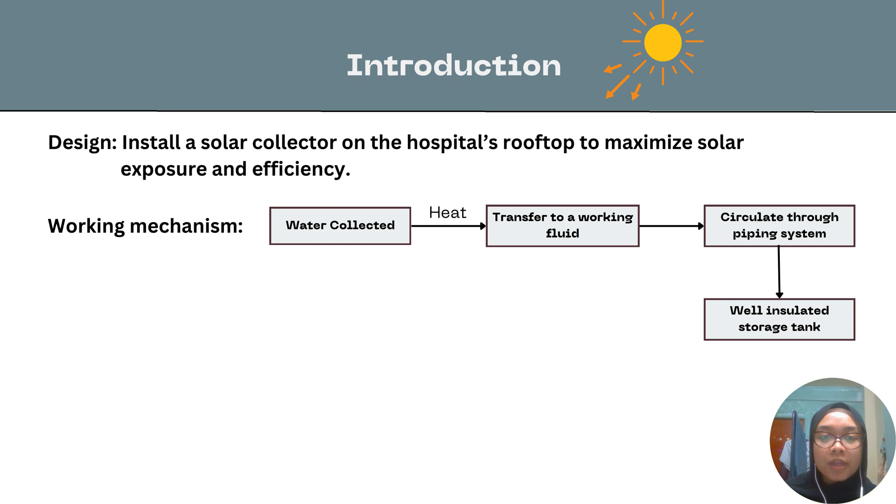The collected solar energy will be converted into heat and transferred to a working fluid, which will then circulate through an integrated piping system to a well-insulated storage tank. The stored hot water in the storage tank then will be supplied to the hospital for its continuous need for sanitation,

laundry, and patient care. The system will be designed to ensure a reliable and consistent hot water supply while significantly reducing energy consumption and operational costs. This initiative aligns with sustainable practices, supporting hospitals' commitment to environmental responsibility and energy efficiency.

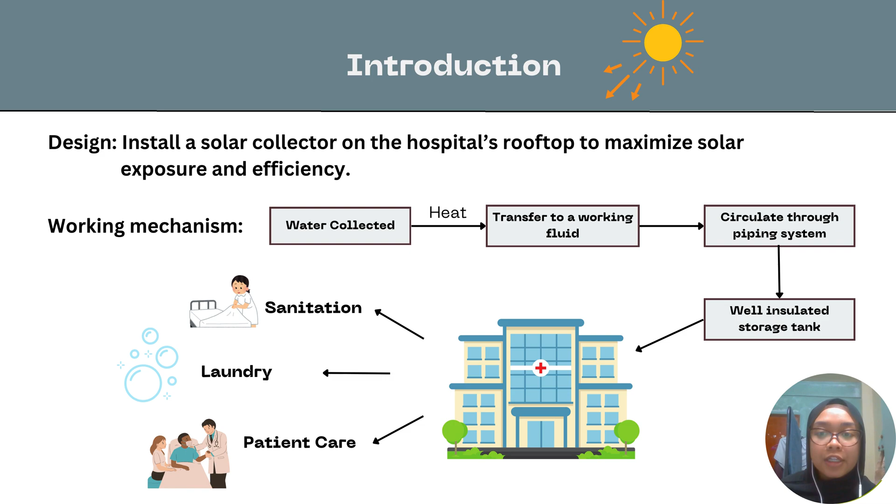Solar water heater is an effective way to generate hot water using solar. They are categorized into two types, which is active systems, which utilize circulating pumps and controls, while passive systems operate without them.

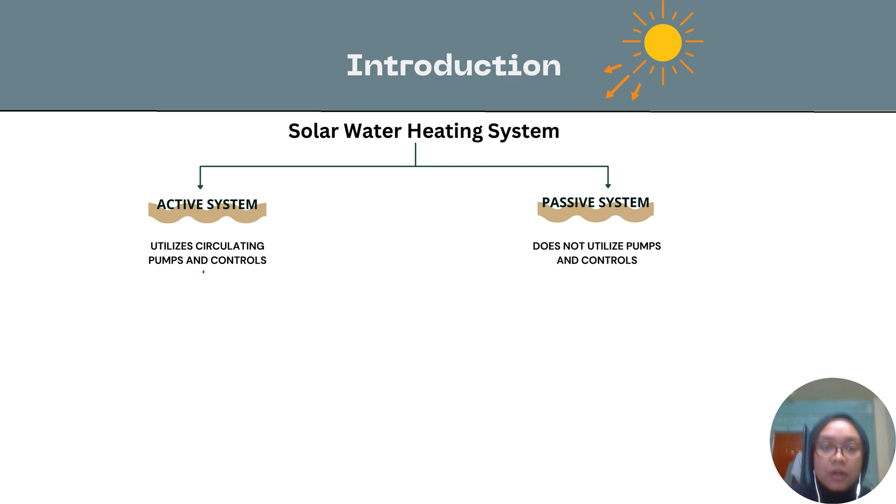For active solar water heating system, which are categorized into two types, which is direct circulation system, or known as open loop system, and also indirect circulation system, or known as closed system. Direct circulation systems use pumps to move household water through solar collectors and into the home, making them suitable for areas with mild climates where freezing is rare.

In contrast, indirect circulation system, or known as closed loop system, use pumps to circulate a non-freezing heat transfer fluid through the collector and a heat exchanger to heat the household water, which is ideal for regions with frequent freezing temperatures.

For passive solar water heating system, there are two main types of passive system, which is integral collector storage, which consists of a storage tank covered with a transparent material to allow solar heating of the water. And also another one is thermosiphon system, where water is heated in a rooftop collector and flows through the plumbing when a hot water faucet is opened.

In this project, the direct open loop water heating system is chosen to be designed for hospital necessities. In this system, the water that will be used in the hospital will be circulated directly through the solar collectors, which then will be heated by the sun. This design is straightforward and involves fewer components, making it easier to install and maintain.

And since the water is heated directly in the collectors, it results in higher efficiency and lower installation and maintenance costs. The disadvantage of this system is it is not suitable for climates with freezing temperatures, as the water can freeze and cause damage to the system, hence it is suitable to be designed in Malaysia as the climate is hot.

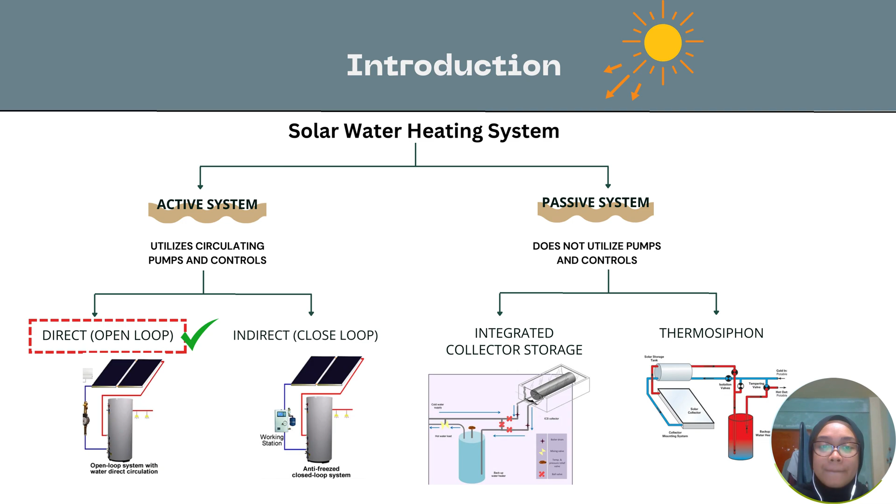Most solar water heaters need a well-insulated storage tank with extra outlets and inlets connected to the solar collector. In two tank systems, the solar heater preheats the water before it enters a conventional heater, while one tank systems combine the backup heater and solar storage in one tank.

There are three main types of residential solar collectors, which are flat plate collectors, integral collector storage system, and also evacuated tube collector. Flat plate collectors are insulated, weatherproof boxes that contain a dark absorber plate under one or more glass or plastic, which is polymer, covers, while unglazed flat plate collectors, typically used for solar pool heating, have a dark absorber plate made of metal or polymer without a cover or enclosure.

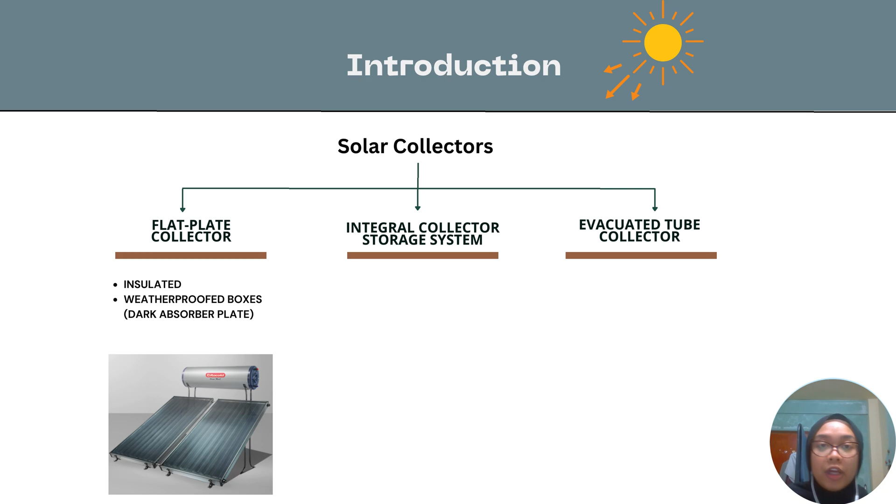The integral collector storage system, also known as ICS or batch system, features one or more black tanks or tubes in an insulated glazed box. Cold water first passes through the solar collector, which preheats the water. The water then continues on to the conventional backup water heater, providing a reliable source of hot water. They should be installed only in mild freeze climates because the outdoor pipes could freeze in severe cold weather.

For the last type of solar collectors, which is evacuated tube, they feature parallel rows of transparent glass tubes. Each tube contains a glass outer tube and metal absorber tube attached to a fin. The fin's coating absorbs solar energy but inhibits radiative heat loss. These collectors are used more frequently for United States commercial applications. In this project, the flat plate collector is chosen to be designed due to their versatility, cost effectiveness, and reliable performance.

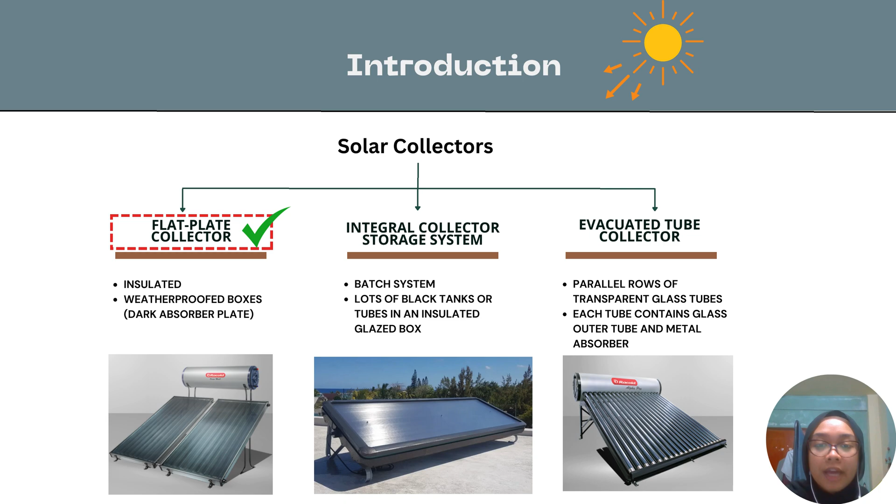This project of solar water heating system has three objectives. The first objective is to design a solar water heating system in providing hot water to a hospital in Ipoh. The second objective is to conduct a comprehensive cost and economic analysis for solar water heating system to assess its financial feasibility. And the last objective is to identify the potential environmental impact associated with solar water heating system that will be designed.

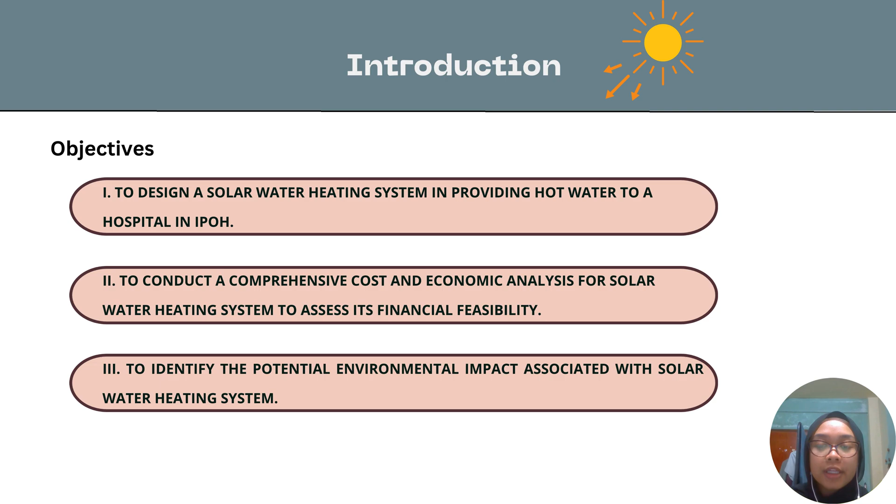There are three scopes of work in this study. The first one is employing SolidWorks software to design the solar plate collector for open loop solar water heating system. The selection of materials plays a crucial role in this process, requiring careful attention to thermal properties such as thermal conductivity and radiant heat transfer coefficients.

To accurately size the solar water collector, which is the system's primary component, the data on the hospital's annual hot water consumption is gathered through a literature review. This ensures that the system is tailored to meet the specific needs of the hospital in Ipoh effectively.

The second scope of work is to perform cost and economic analysis for the thorough examination of energy cost and payback period. After completing the design and necessary calculations, a cost and economic analysis will be performed to evaluate the financial viability of implementing the solar water heating system.

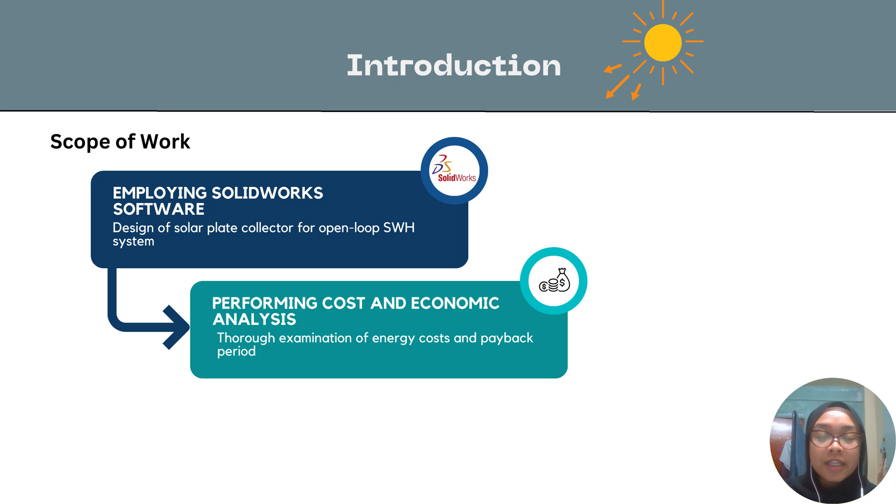This analysis includes an examination of energy costs and the calculation of the payback period, which indicates the time required for the project to recover its initial investment. A shorter payback period is advantageous as it reflects a faster return on the initial expenditure.

The last scope of work of this project is to perform environmental analysis. So the solar water heating system must operate under various environmental conditions, making an environmental analysis essential for ensuring optimal performance. So gaining insights into how these environmental elements affect the solar water heating system is critical for designing solutions that can function efficiently and sustainably over time.

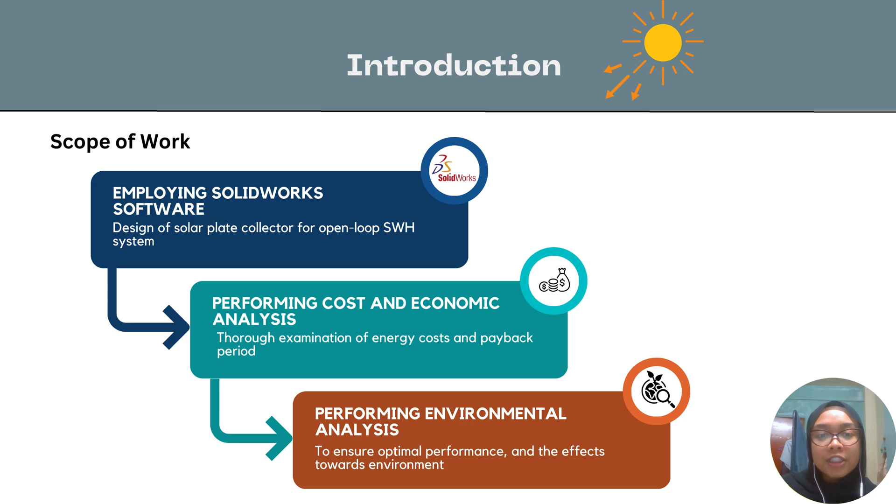Next, moving on to the literature review section. So the first literature review done was on the hospital capacity. So here we have selected an example of KPJ Ipoh Specialist Hospital. According to KPJ Health Official 2024, KPJ Ipoh now has a capacity of 267 beds, indicating that they could admit around 267 patients at one time.

Next is the local solar irradiance of Ipoh. According to the International Renewable Energy Agency (IRENA), Ipoh has a global horizontal irradiance or GHI average of 4.9 kilowatt-hours per square meter daily, or about 1,800 kilowatt-hours per square meter yearly.

And now we move on to the flat plate collector. The flat plate collector has several advantages over other solar thermal systems. It is simple, cost-effective, and reliable. Flat plate collectors are also able to capture both direct and diffuse solar radiation. Thus, it is very efficient.

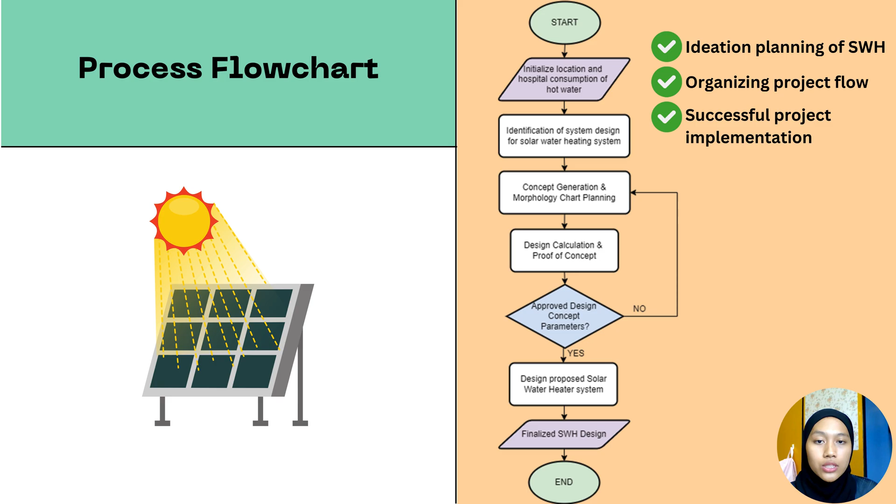After that, if the design concept parameters are approved by the team members, we could then proceed with the designing step. And this will indicate the finalized solar water heater system, and the flowchart ends. So the significance of this flowchart is crucial for the ideation planning of the solar water heater, organizing the project flow, and also ensuring a successful project implementation.

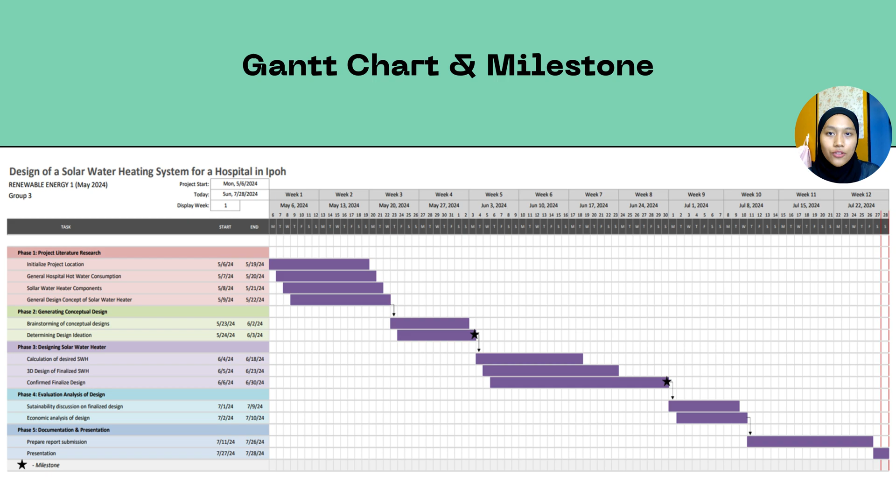Now, for the Gantt chart and milestones, here we have highlighted five main phases of the project. The first phase is project literature research, phase 2 is generating conceptual design, phase 3 is designing the solar water heater, phase 4 is evaluation analysis of design, and finally phase 5, which is the documentation and presentation phase. So throughout the semester, we have consumed around 12 weeks in order to complete the project.

Next, for the project activities, we have highlighted two main activities, which are first the calculation part and second the designing part. For the calculation part, we have two main equations that we have used. Given the specification and initialization parameters, we first have to find the heat energy transfer, and afterwards we use the second formula to obtain the required number of panels in order to meet the project outcome, which is having a water discharge of 80 degrees Celsius.

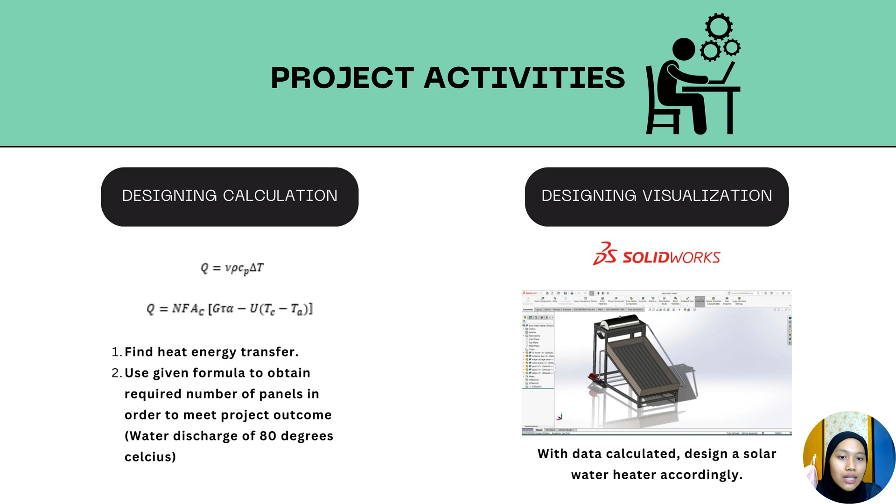And after finalizing the desired parameters, next comes the designing part, in which we have utilized SolidWorks simulation to design the solar water heater system.

Before proceeding to the calculation section, first we have to identify the assumptions and also given specifications for this project. So first, we assume the ambient temperature in Malaysia is 26 degrees Celsius. And second, we also assume that the supply flow into the collector has a temperature of around 30 degrees Celsius. And according to our literature survey, we have identified that the average solar radiation in Malaysia is around 4.9 kilowatt hour per meter squared each day.

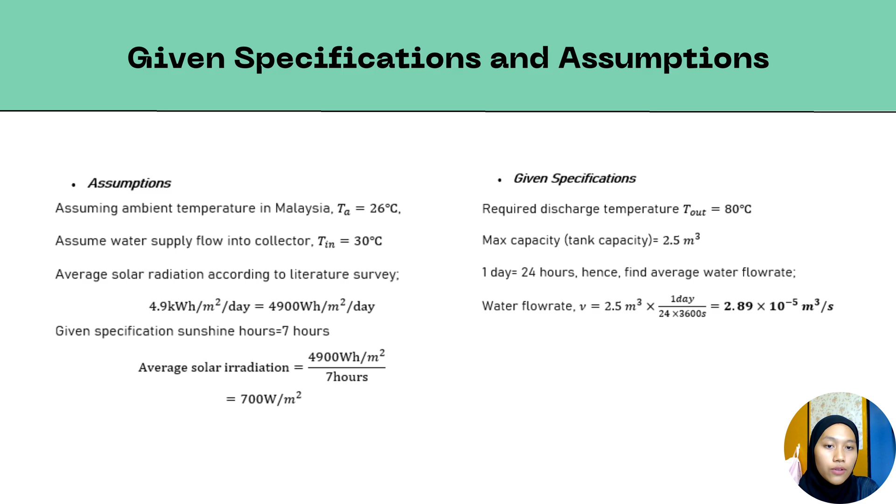And since we have been given the specification of sunshine hours is 7 hours, therefore we can calculate the average solar irradiation in Malaysia is around 700 watt per meter squared. Next, for the given specifications, we have identified the required discharge temperature of water, which is T out, should be at least 80 degrees Celsius. We have also been given the maximum capacity, which is 2.5 meter cube. And since one day is equal to 24 hours, therefore we could find the water flow rate, which is finally 2.89 times 10 to the power of negative 5 meter cube per second.

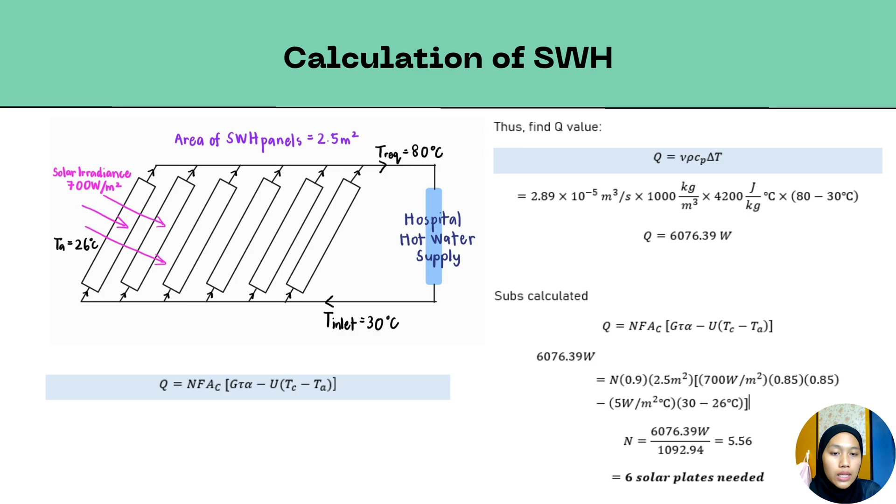Now we could proceed for the calculation part of the solar water heater system. So previously we have calculated the volume flow rate is around 2.89 times 10 to the power of negative 5 meter cube per second. Plugging in that value into the stated equation that we have here, we could obtain the overall heat energy transfer, which is the Q value, around 6076.39 watt. After that, we substitute the obtained Q value into the main equation, and hence we could obtain the total solar plates needed, which is around 6 plates for this project.

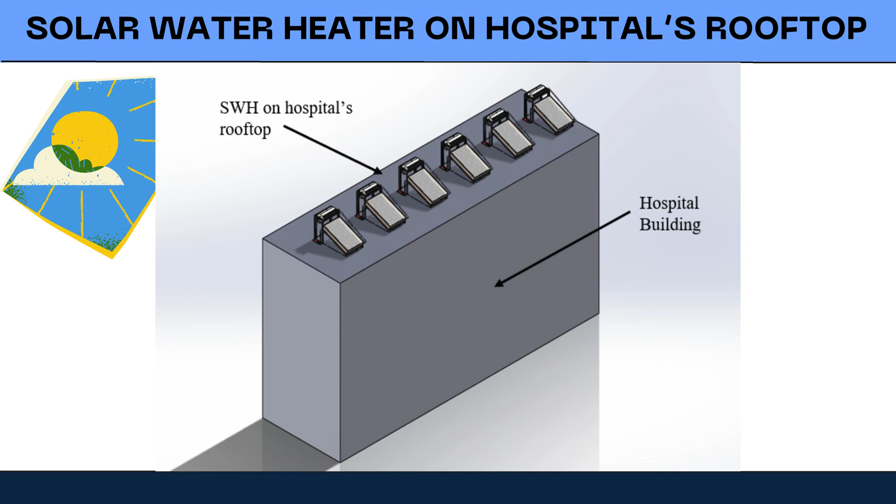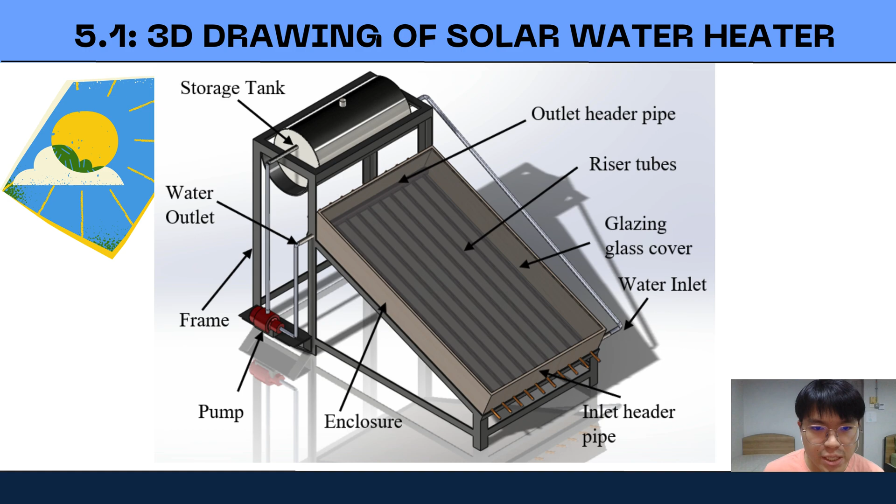So I'll be presenting on the design and components of our solar water heater. As you can see in this 3D model, the main parts include a solar collector panel with a glazing cover, a storage tank to store the water, a piping system with inlet and outlet headers and riser tubes, and a supporting frame. This design efficiently captures solar energy to heat the water.

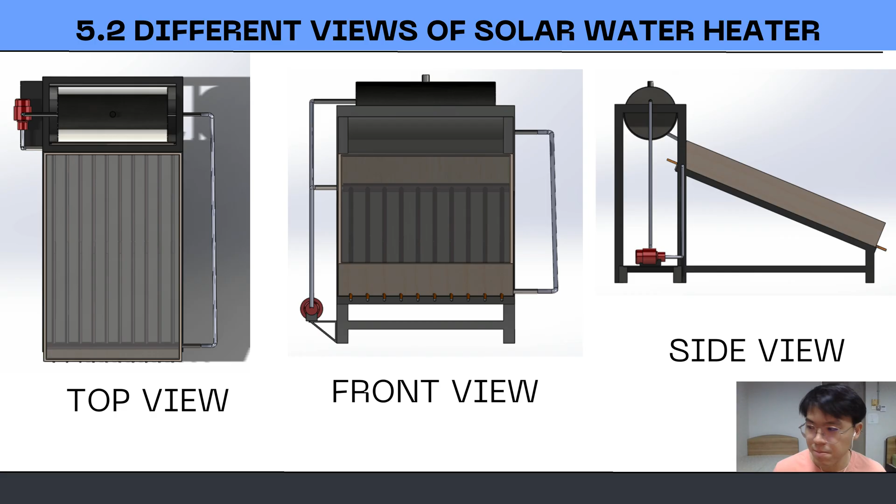Now I will explore the materials used for each component with their justifications, with a special focus on the design factors and key components. I will draw attention to a few parts which affect the efficiency of our solar water heater. First, the glass cover is made of low iron tempered glass for high solar transmittance and durability. Second, the absorber plate uses black coated copper for excellent thermal conductivity and absorption. Third, the glass wool insulation provides high temperature resistance and low thermal conductivity.

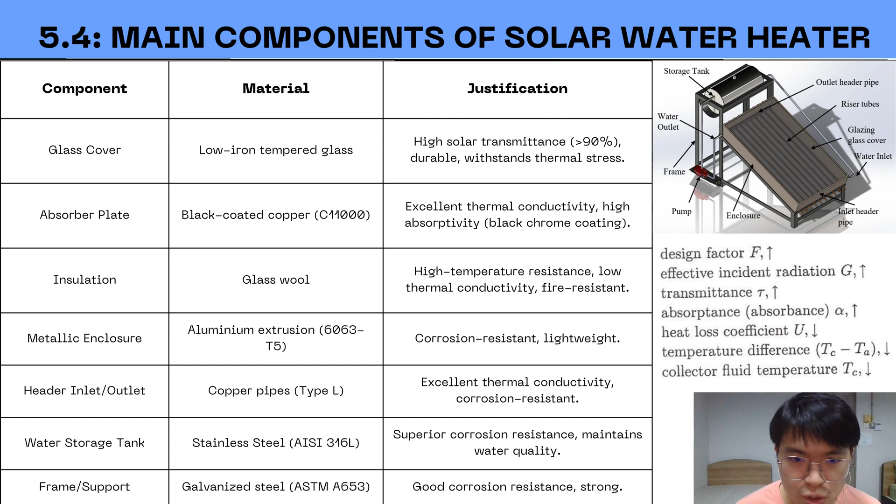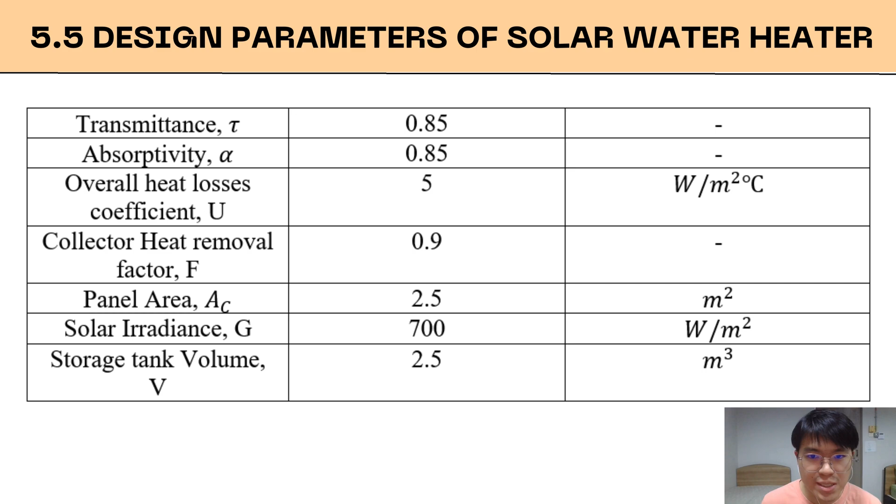So these materials are carefully chosen to maximize the efficiency, durability, and performance of the solar water heating system for the hospital in Ipoh. This solar water heater design efficiently captures solar energy, heats the water, and stores it for use, providing an eco-friendly alternative to traditional water heating methods. These carefully selected materials contribute to the overall efficiency and longevity of the solar water heater. These parameters ensure optimal performance in capturing and retaining solar heat for water heating purposes.

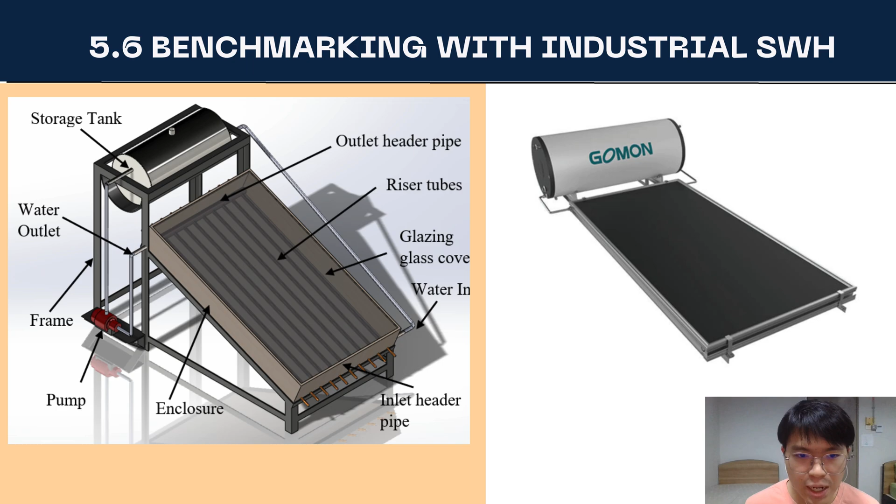For the benchmarking, we have an example of a commercial solar water heater unit, the Gomon model. This gives us a real-world perspective on how these systems look when they are installed. When benchmarking with industrial solar water heater systems, we compare a few factors: first, the efficiency of heat capture and transfer; second, the storage capacity; third, the durability of materials; and lastly, the overall system performance under various environmental conditions. By understanding these components and their interactions, we can optimize solar water heater designs for the hospital in Ipoh, ensuring maximum energy efficiency and reliability.

On to discussion. First, we will talk about the environmental effect and impact. Firstly, the usage of solar water heater will reduce greenhouse gases. This reduces reliance on fossil fuels, cutting carbon dioxide emissions significantly. Next, there's also an air quality improvement, which decreases emissions of SO2, nitrogen oxides, and particulate matter, leading to better air quality.

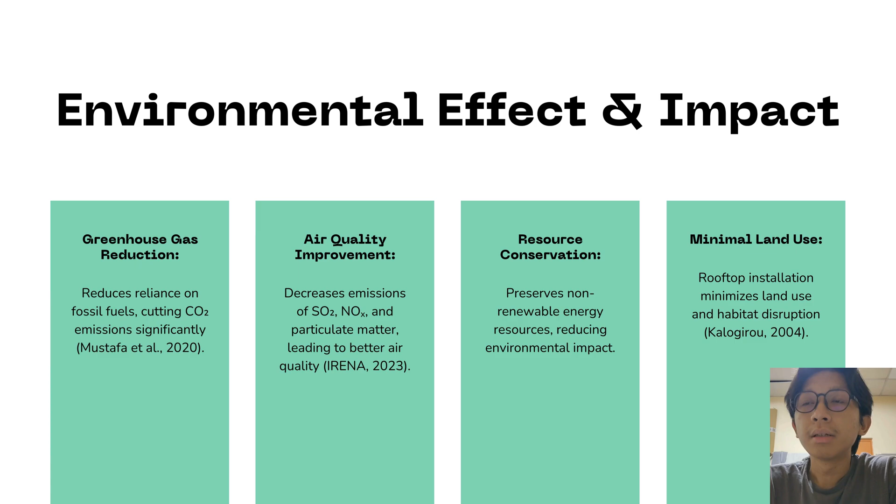Other than that, SWH also allows resource conservation. It preserves non-renewable energy resources, thus reducing environmental impact. And lastly, the SWH has minimal land use. The rooftop installation minimizes land use and habitat disruption.

Next, economic analysis. For the cost of the total energy used, we can get that by multiplying the wattage of the solar plates with the hours of sunshine per day, which is roughly 7 hours, which results in around 159.254 kilowatt hour per day. And as said by TNB, the cost for electricity is 21.8 cents per kilowatt hour.

Thus, we can use these values to calculate the equivalent cost of energy if the water is heated by electricity instead of the solar water heater. Thus, the equivalent is around 12,600 ringgit.

For the initial investment, as mentioned in the literature review, the cost associated with the purchasing, assembling, and all other related costs for the hospital in Ipoh is estimated to be 0.56 ringgit or 56 cents per kilowatt hour produced. Thus, from this, we can calculate that the cost of installment of the solar water heater is around 32,000 ringgit.

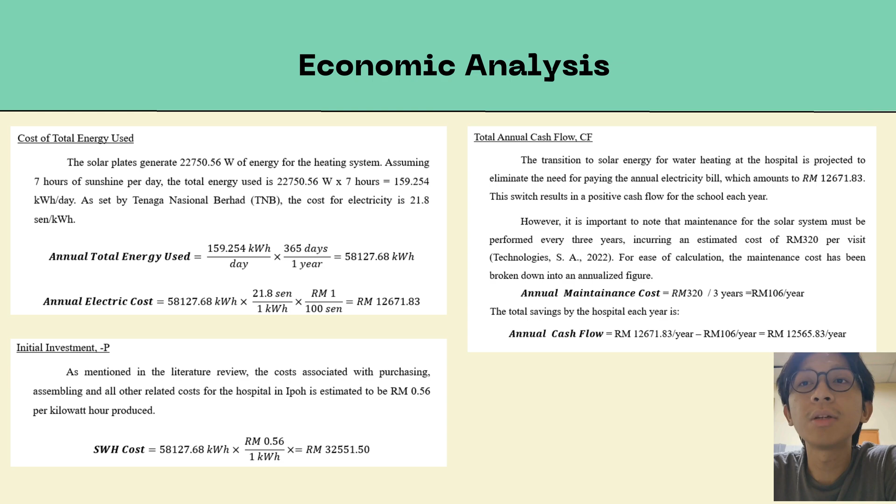And for the total annual cash flow, we take into consideration the annual maintenance cost, which is from literature around 320 ringgit every 3 years. We average this for every year to result in the annual cash flow of 12,565 ringgit and 83 cents per year. Continuing on, assuming that the solar water heater is installed in December, that means the hospital does not need to pay electric bills starting from year 1 onwards.

Hence, we can get the discounted cash flow tables as shown, where the initial investment is around 32,000 ringgit with additional cash flow of 12,000 ringgit every year. As you can see, the payback period is only 2.76 years, meaning that after 2.76 years, the hospital will receive positive cash flow.

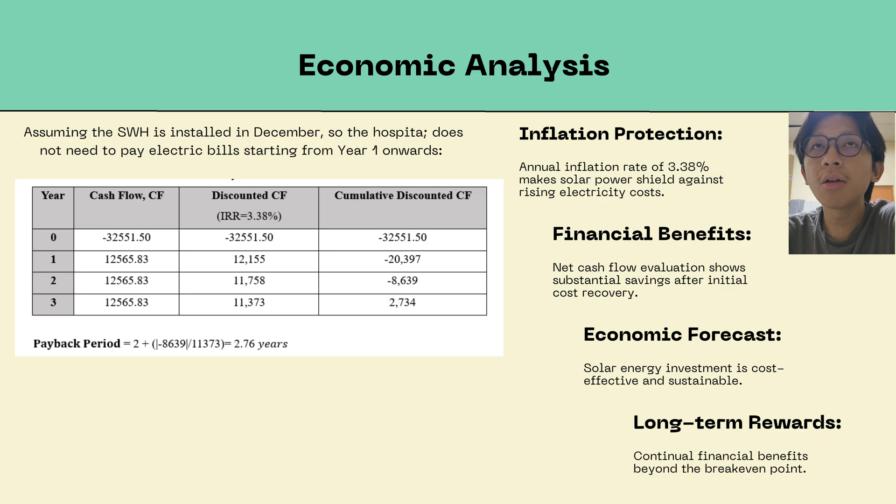Next, the solar energy investment is also cost effective and sustainable. And in the long term, there will be continual financial benefits beyond the break-even point. So in conclusion, the installation of solar water heater is economically feasible.

Finally, we will discuss the social sustainability. First, the solar water heater will cause improved healthcare services. The reliable hot water supply enhances patient care, sanitation, and hygiene. Secondly, it allows resources to be reallocated. Thus, savings can be made on energy bills, which can be directed to patient care and staff development instead of the electricity.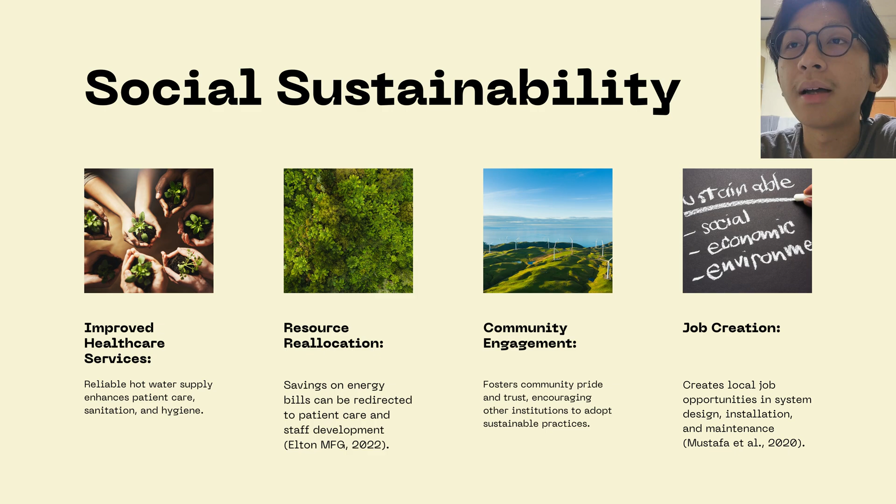Next, in terms of community engagement, it fosters community pride and trust, encouraging other institutions to adopt sustainable practices, providing a chain reaction. And lastly, the solar water heater also creates jobs. It creates local job opportunities in system design, installation, and maintenance.

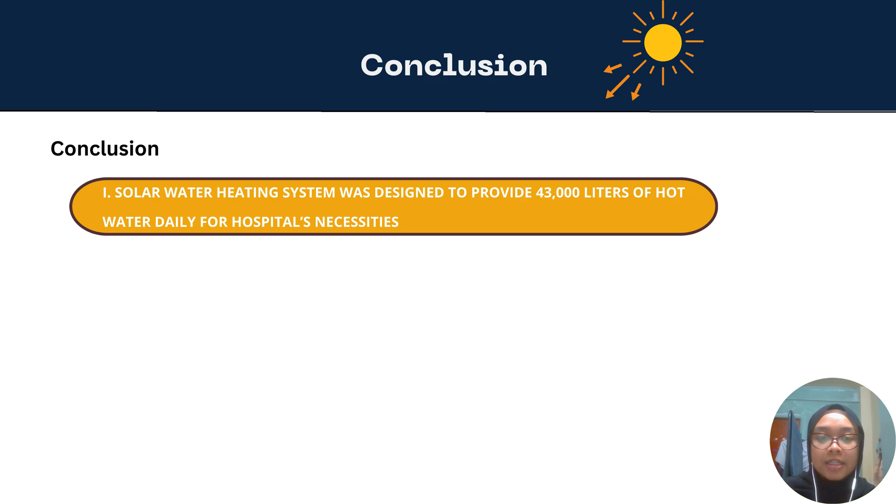Economically, the system proves to be a sound and great investment. With an initial cost of RM 8,000 and annual savings of RM 3,000 on electricity bills, the payback period is calculated to be approximately 3 years. This quick return on investment, combined with the long term savings and protection against rising energy costs, underscores the financial feasibility of the project.

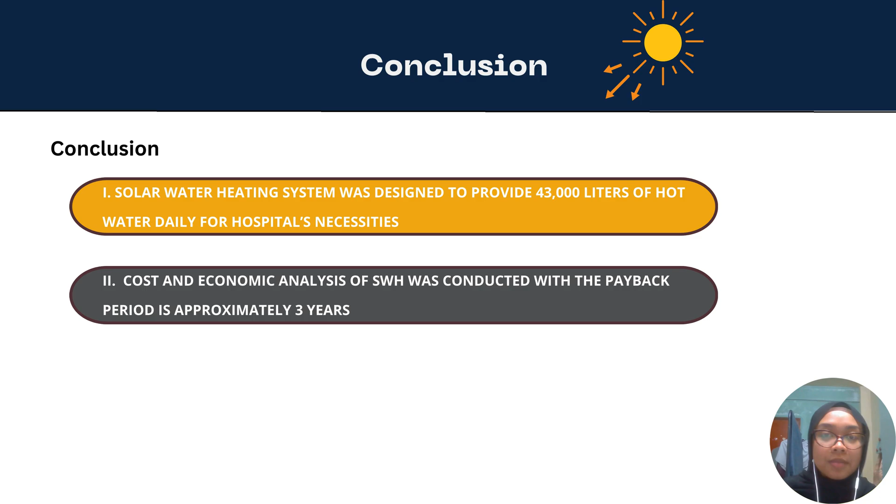From an environmental perspective, the solar water heating system significantly reduces greenhouse gas emissions, aligning with global efforts to mitigate climate change and promoting a cleaner environment. The reduction in pollutants such as sulfur dioxide and nitrogen oxides also contributes to improved air quality, benefiting public health.

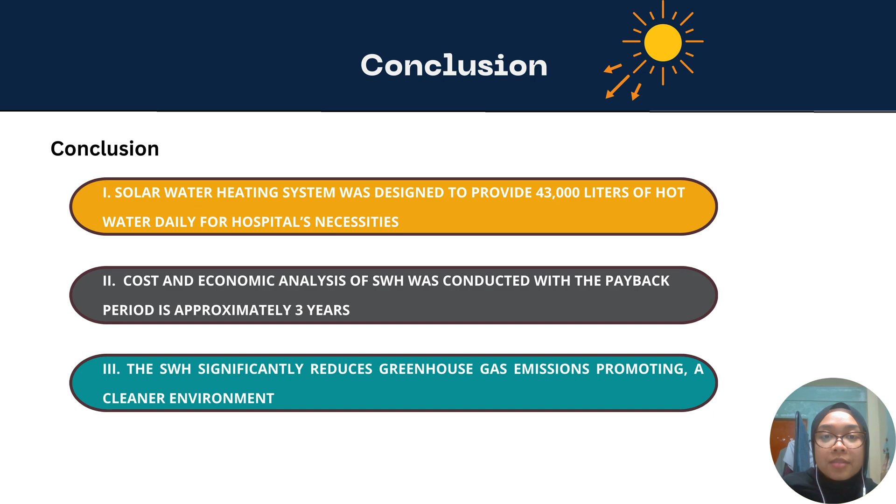In summary, the proposed solar water heating system not only meets the operational requirements of the hospital, but also supports its commitment to sustainability and energy efficiency. By transitioning to solar power, the hospital sets a benchmark for environmentally responsible healthcare practices, ensuring a sustainable and cost effective solution for its hot water needs.